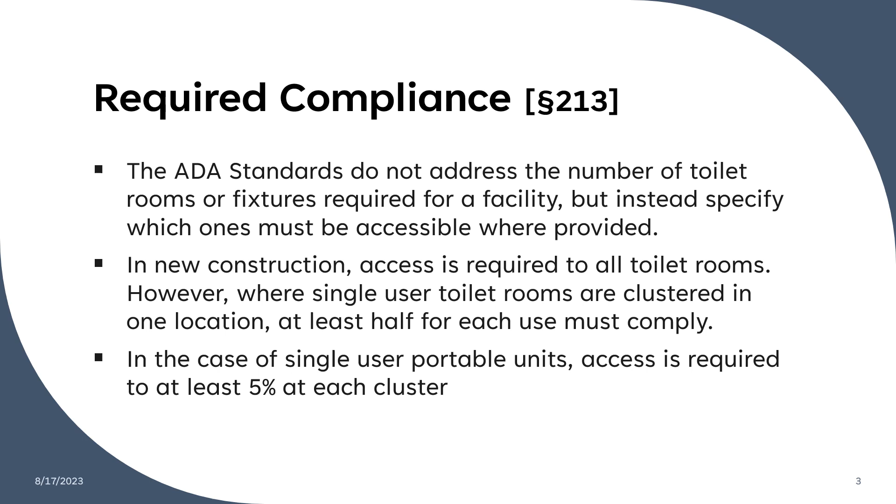In addition, compliant toilet rooms and portable units must be labeled by the International Symbol of Accessibility unless all are accessible.

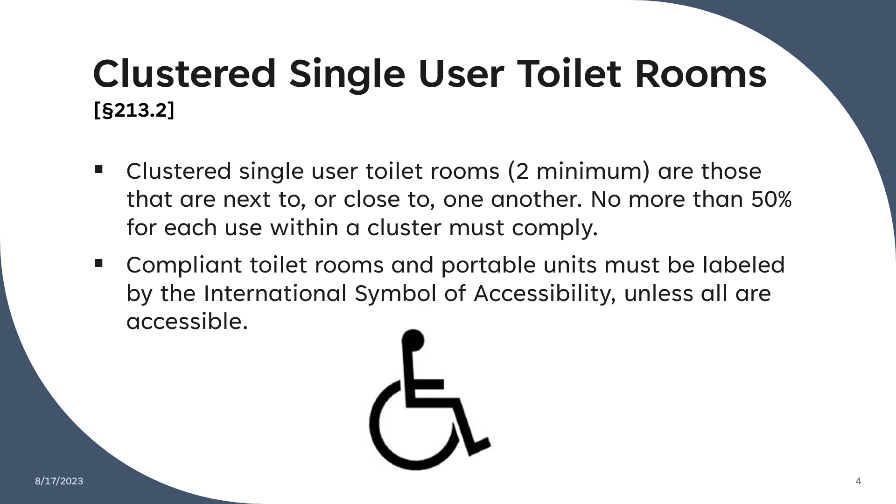Accessible unisex toilet rooms cannot serve as a substitute for access to multi-user rooms, except where alterations to do so would not be technically feasible. Where both types of restrooms are provided, they both must comply.

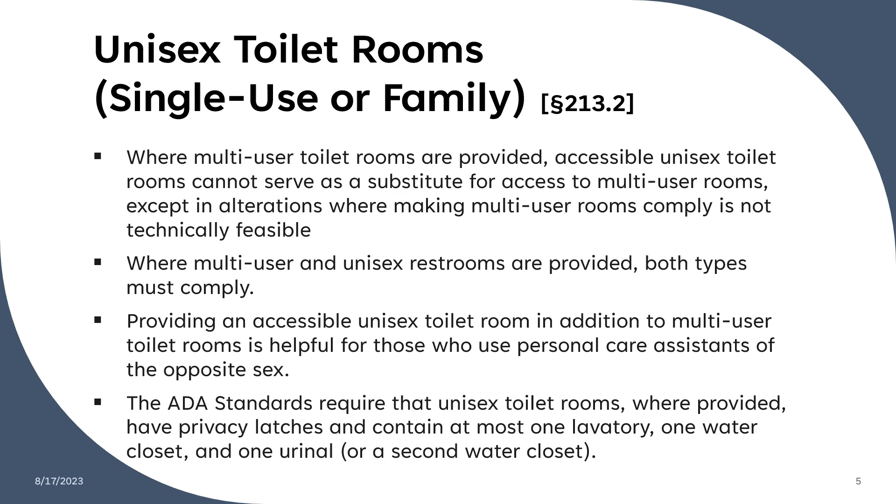ADA standards require that unisex toilet rooms, where provided, have privacy latches and contain at most one lavatory, one water closet, and one urinal.

Compliance in an alteration is not required where it is technically infeasible, which is defined as something that has little likelihood of being accomplished because existing structural conditions would require removing or altering a load-bearing member that is an essential part of the structural frame, or because other existing physical or site constraints prohibit modification or addition of those elements.

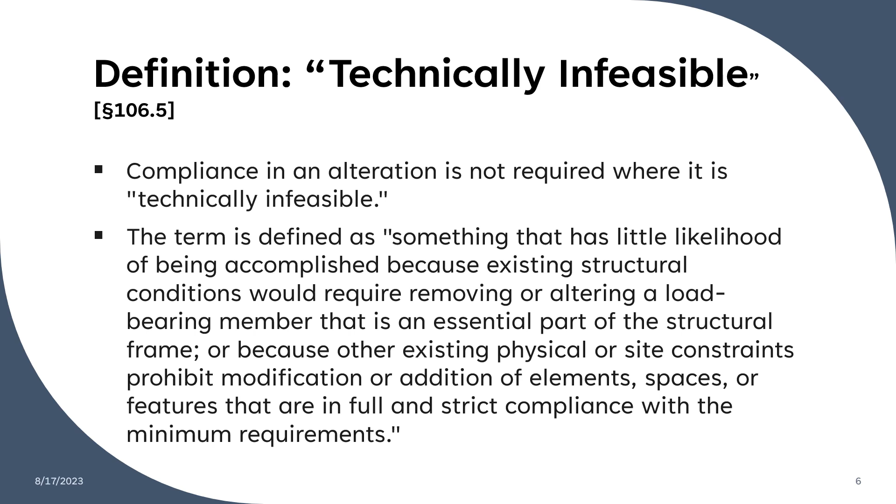When existing toilet rooms are altered, the standards apply according to the planned scope of work. If one toilet room on a floor is altered, the standards apply to that room only. Similarly, if all the toilet rooms on the floor are altered, the standards apply to each toilet room that would be required to comply in the new construction.

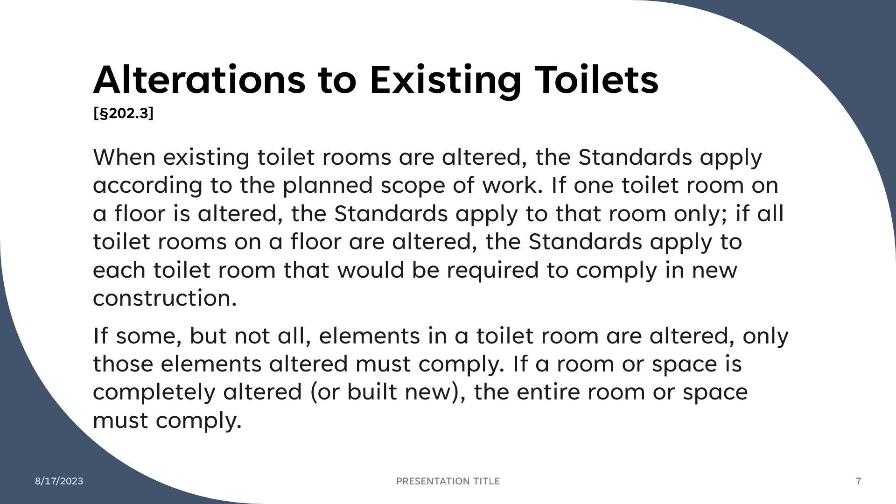For the elements, if some but not all are altered, only those altered elements must comply, unless the entire room or space has been redone.

There are exceptions for qualified historic facilities, such as those determined by the appropriate state historic preservation official or advisory council on historic preservation.

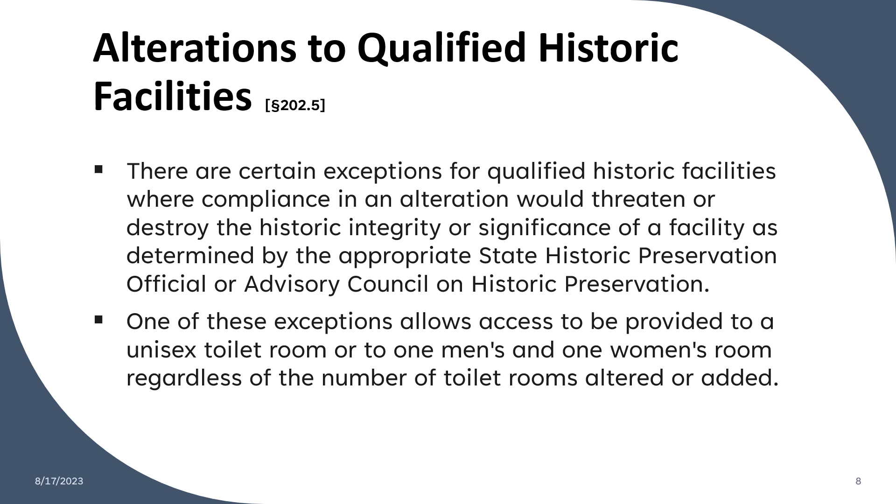Next, we move on to the general components common among single and multi-user bathrooms. Criteria for water closets address location, clearance, seats, grab bars, flush controls, and dispensers.

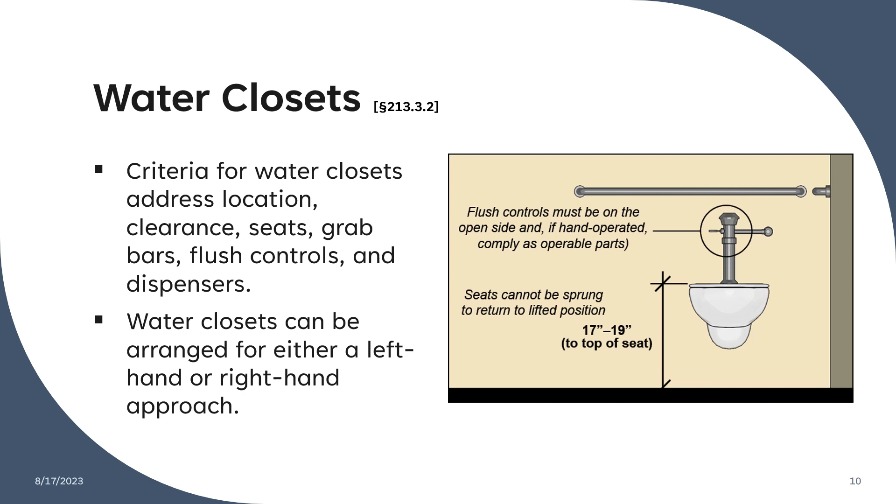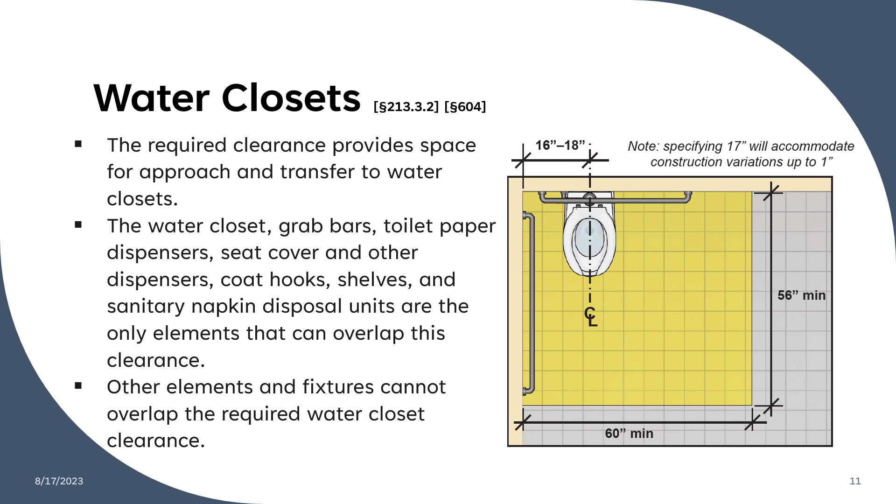Water closets can be arranged for either a left-hand or right-hand approach. The required clearance provides space for approach and transfer to water closets. Elements and fixtures cannot overlap the required water closet clearance, with some exceptions such as grab bars, toilet paper dispensers, etc.

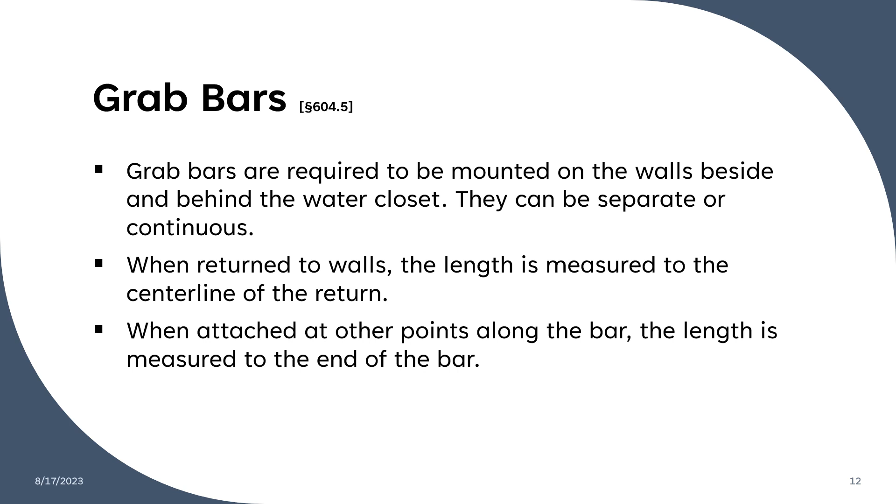Grab bars are required to be mounted on the walls beside and behind the water closet. They can be separate or continuous. The length of the grab bar is measured based on whether it returns to the wall or is attached to other points along the bar.

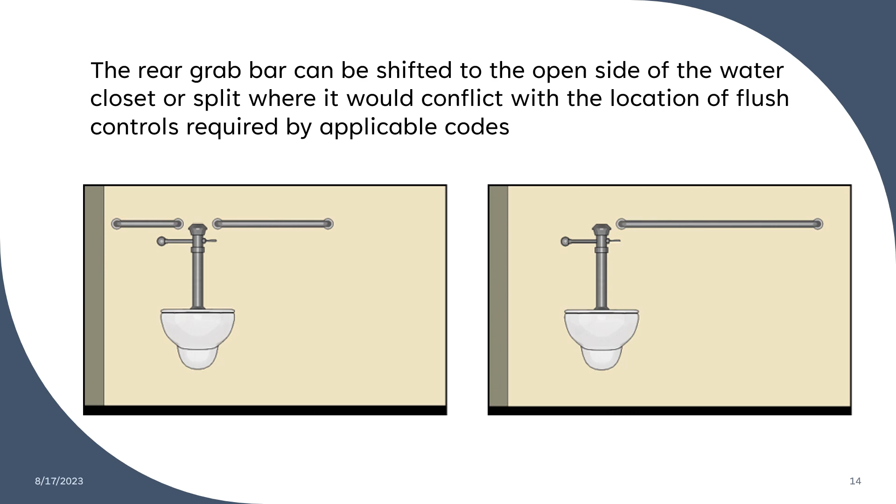Grab bars can have circular or non-circular cross sections but must have rounded edges. There's a requirement for clearance between the grab bar and the wall to prevent entrapment, and any projecting object must be located at least 12 inches above the grab bars and at least 1.5 inches from the bottom.

There's a structural strength requirement of at least 250 pounds at any point along the bar.

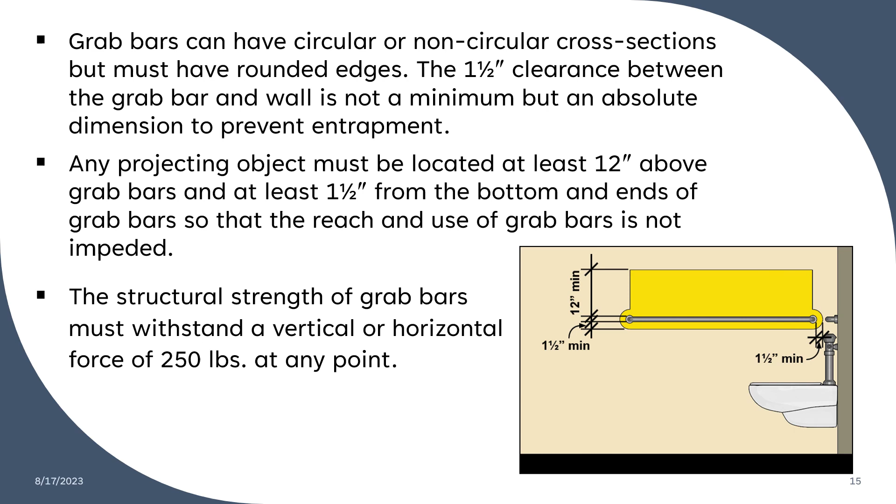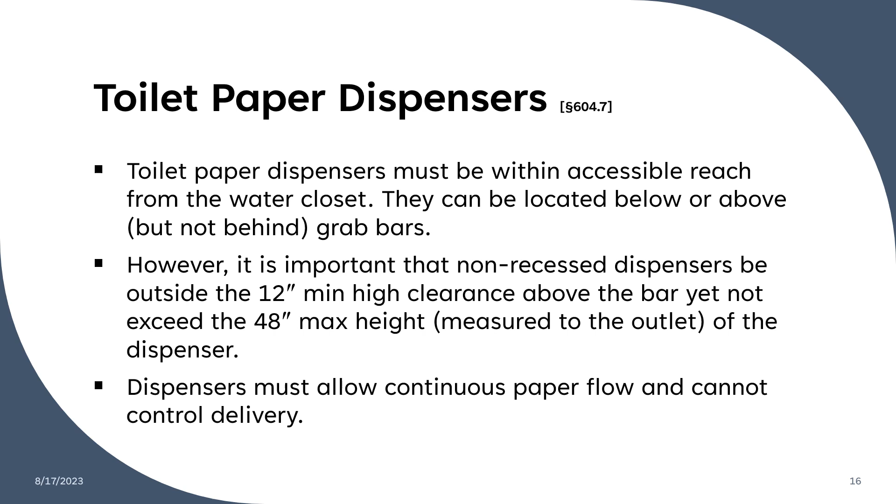Toilet paper dispensers must be within accessible reach from the water closet. It's also important that non-recessed dispensers be outside the 12-inch minimum clearance above the bar. Dispensers must allow continuous paper flow and cannot control delivery. Here are the specifications for recessed and non-recessed dispenser locations.

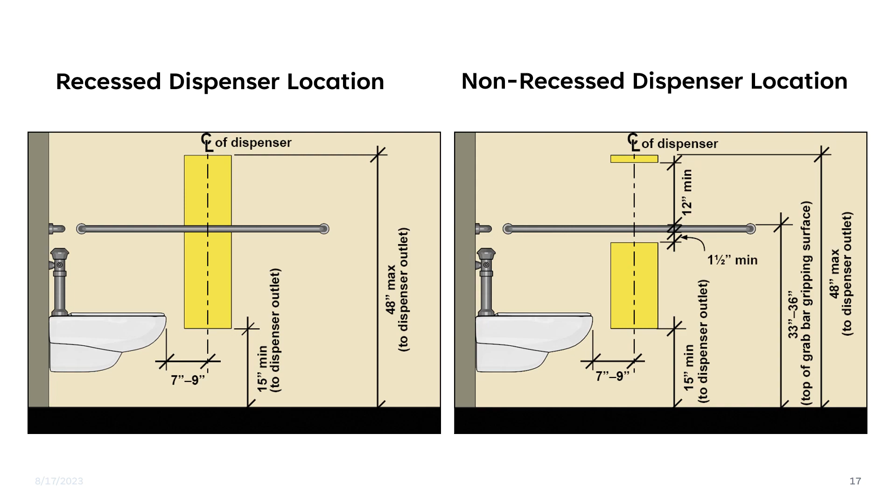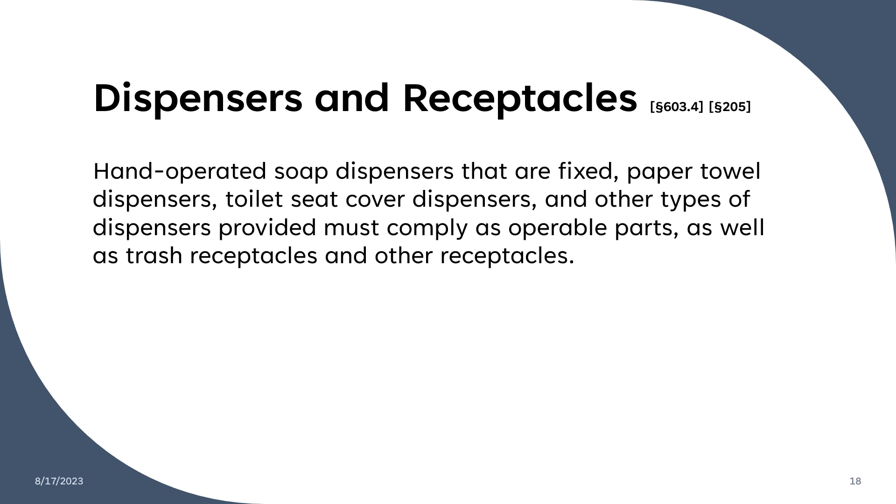Dispensers and receptacles such as hand-operated soap dispensers that are fixed, paper towel dispensers, toilet seat cover dispensers, and other types must comply as operable parts.

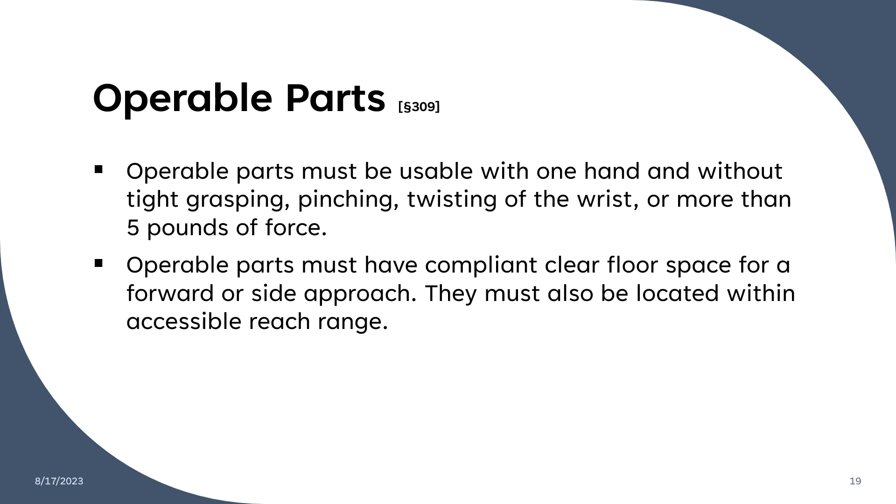Operable parts must be usable with one hand and without tight grasping, pinching, or twisting of the wrist, or more than 5 pounds of force. Operable parts must have compliant clear floor space for forward or side approach, and they must also be located within accessible reach range.

Next, we're going to go into the reach ranges from a forward and side reach, as well as a quick look at children's reach ranges.

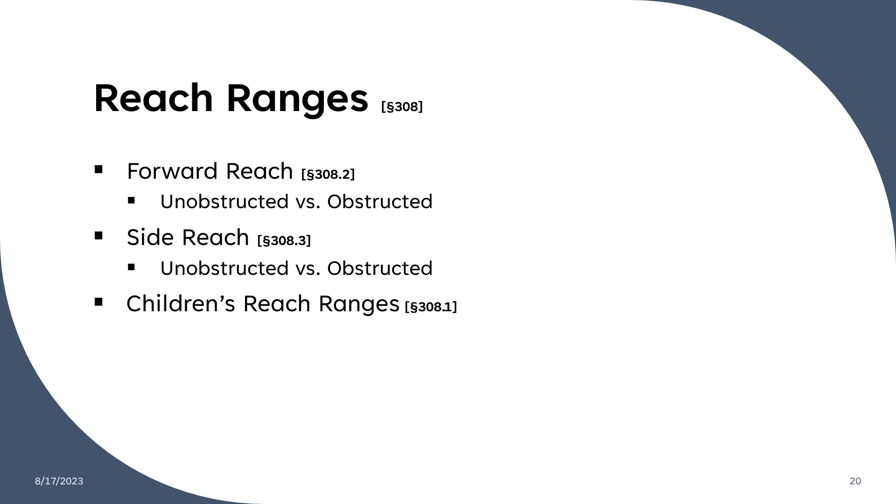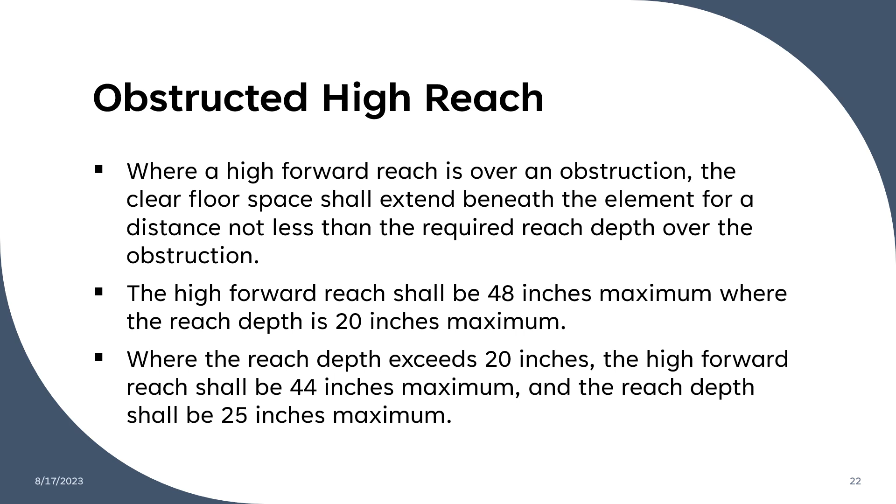An unobstructed forward reach shall be from 15 inches to 48 inches above the ground. Where a high forward reach is over an obstruction, the clear floor space shall extend beneath the element for a distance not less than the required reach depth over the obstruction. The high forward reach shall range depending on the reach depth below it. Here we have the diagram showing that the maximum height is dependent on the depth of the obstruction.

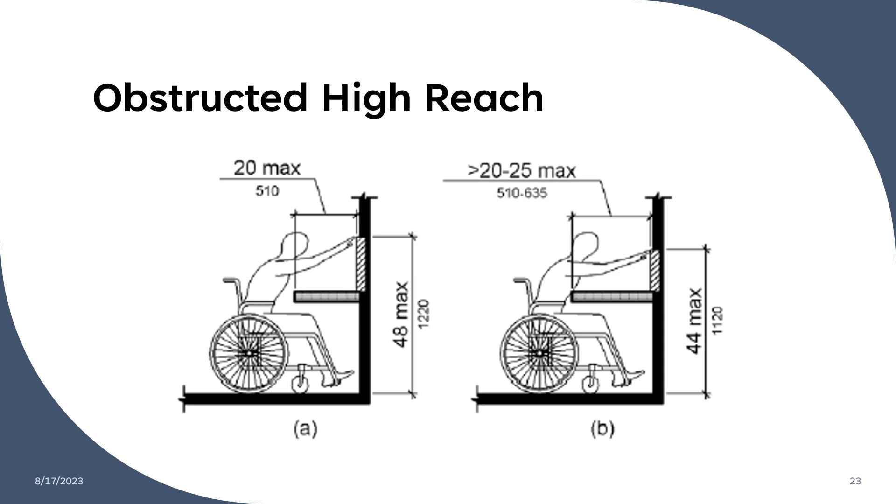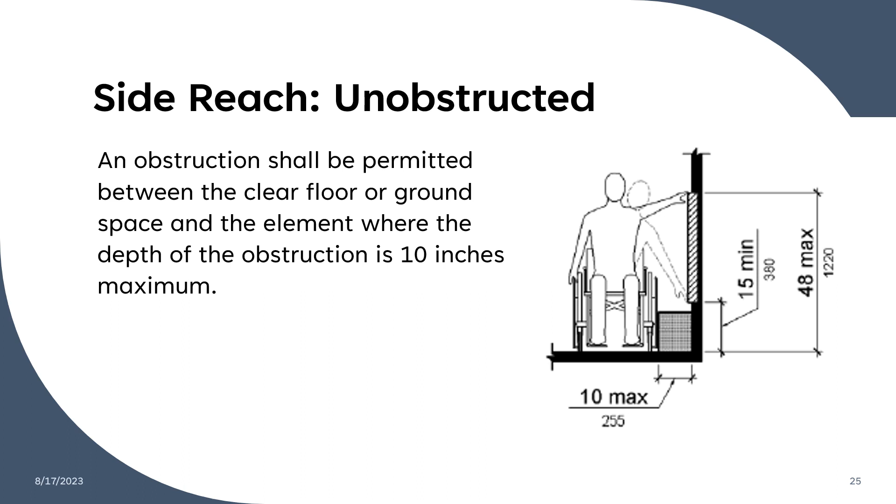For an unobstructed side reach, the range shall be from 15 to 48 inches. An obstruction shall be permitted between the clear floor or ground space and the element where the depth of the obstruction is 10 inches maximum. For an obstructed high reach, the range is between 24 to 34 inches. In similar fashion, the depth of the obstruction changes the maximum height of the reach.

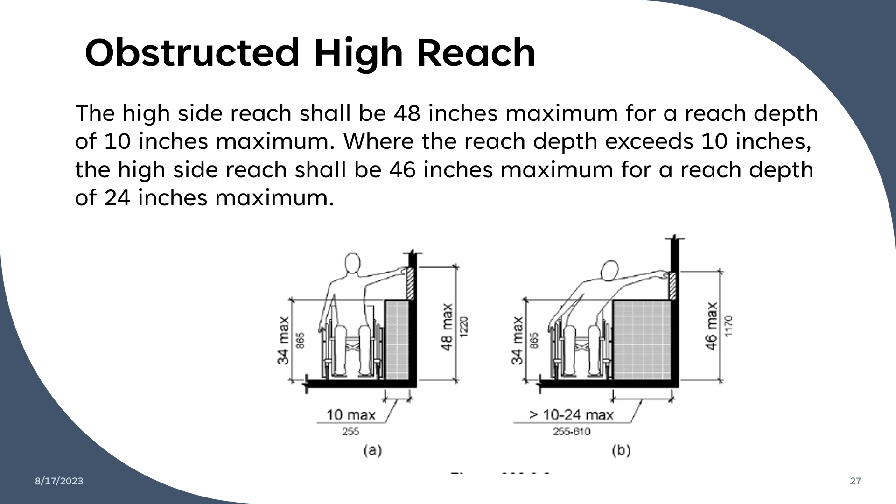While this presentation is looking at the ADA guidelines for adults, I did want to point out that there are guidelines for the various age ranges for children.

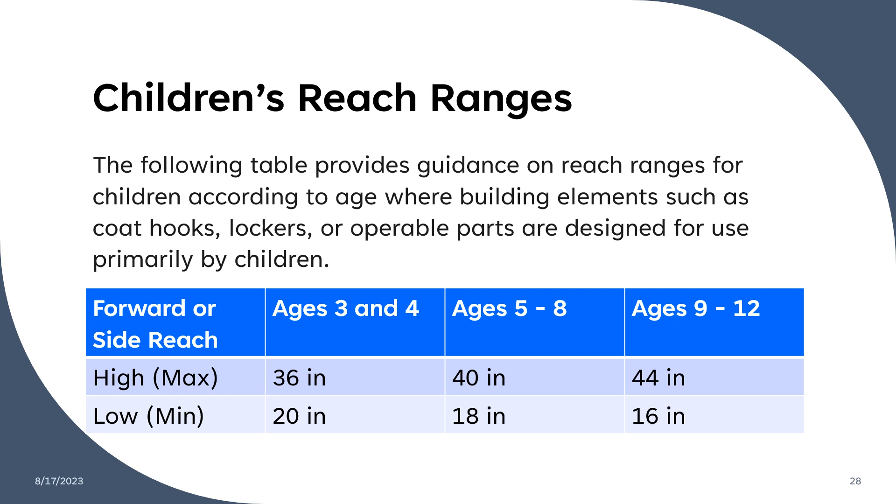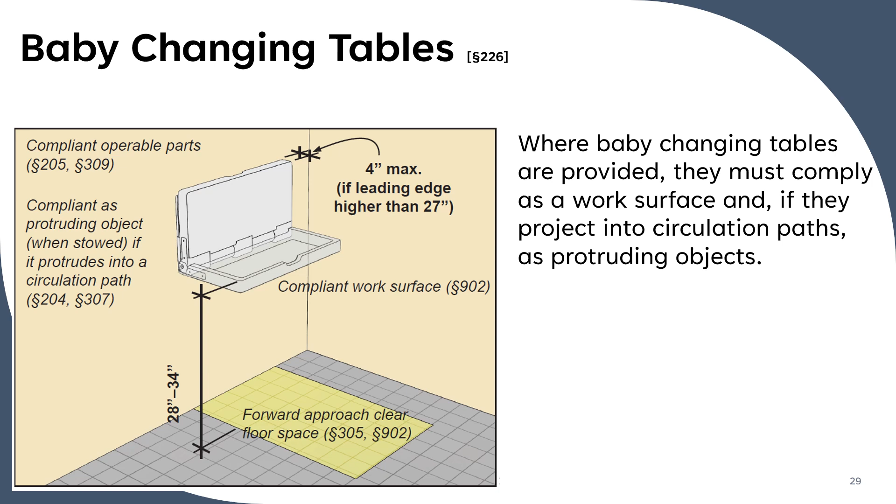Where baby changing tables are provided, they must comply as a work surface and a protruding object. It requires a clear forward approach and be compliant as an operable part. Baby changing tables cannot overlap fixture clearances or door maneuvering clearances when stowed. However, the clear space for a forward approach can overlap those clearances.

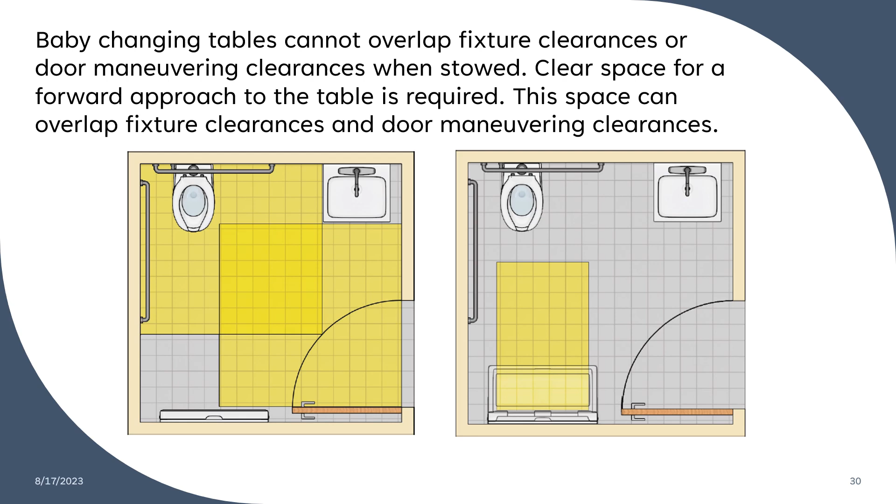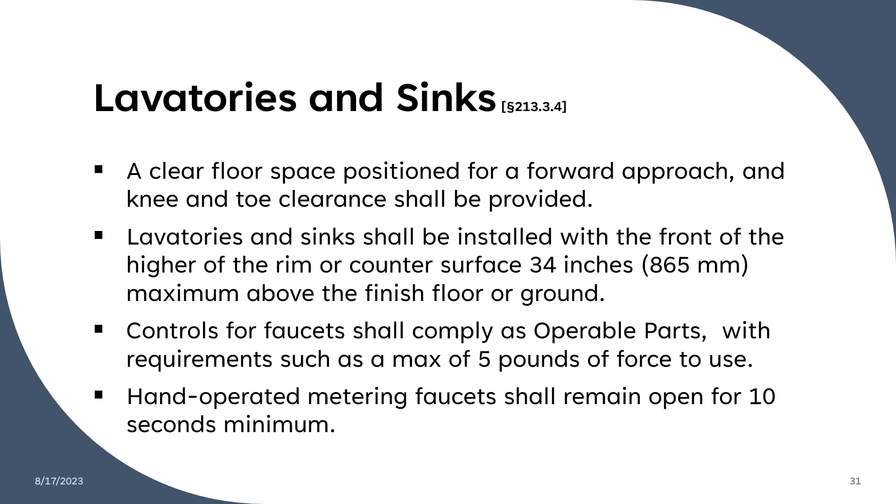Lavatories and sinks require clear floor space positioned for a forward approach, and knee and toe clearances shall be provided at a maximum of 34 inches from the ground. Controls for faucets shall comply as operable parts and only require a maximum of 5 pounds of force to use. And finally, hand-operated metering faucets need to remain open for 10 seconds at least.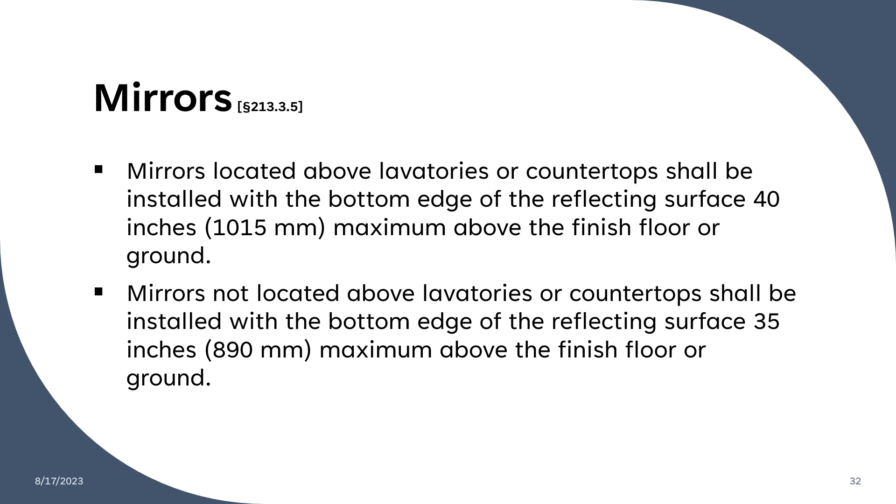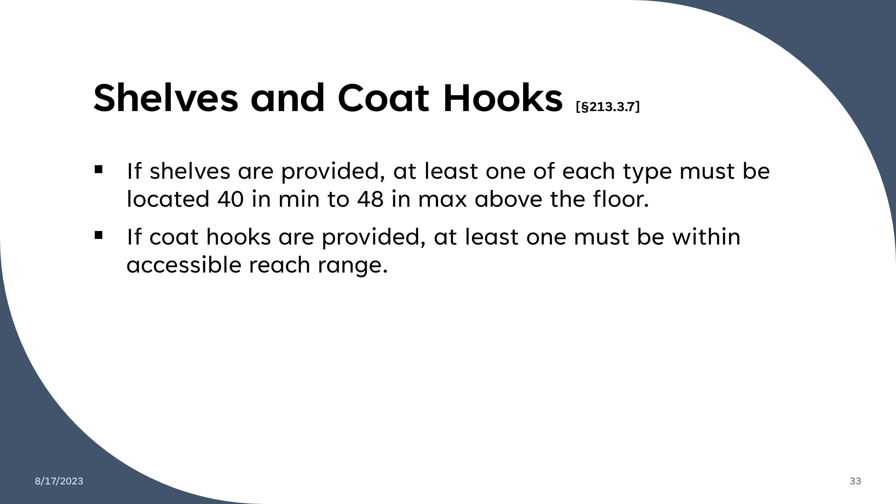Mirrors shall be installed with the bottom edge of the reflecting surface 40 or 35 inches from the ground, depending on whether or not the mirror is located above a lavatory countertop or not. If shelves are provided, at least one of each type must be located 40 inches to 48 inches above the floor, and if coat hooks are provided, at least one must be within accessible reach range.

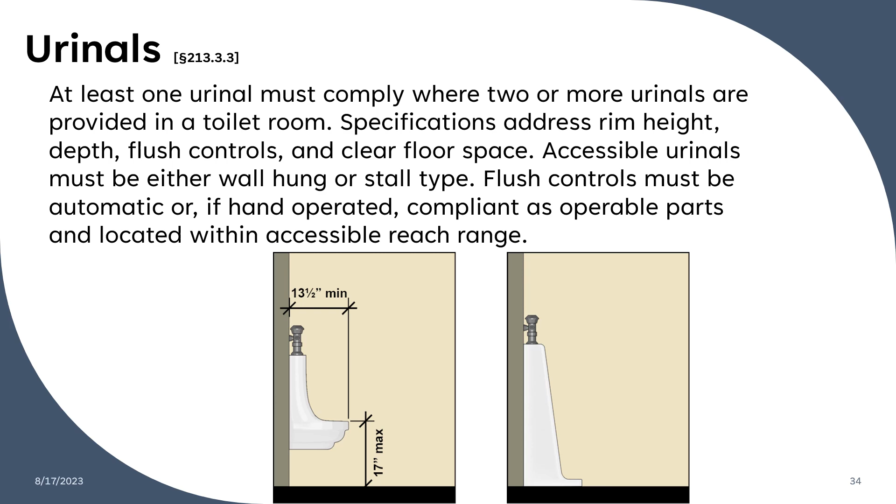At least one urinal must comply where 2 or more urinals are provided in a toilet room. Specifications address rim height, depth, flush controls, and a clear floor space. Accessible urinals must be either the wall-hung or stall type.

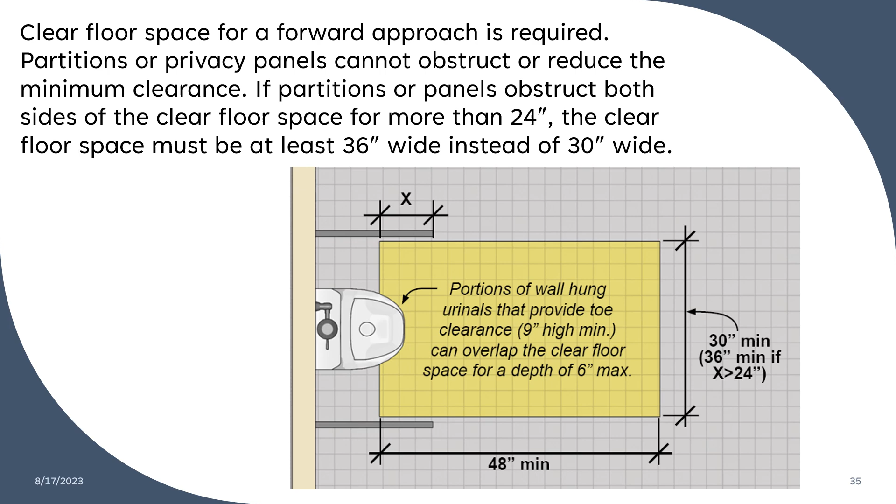Here are additional requirements for urinals, including a clear floor space for a forward approach, and that partitions or privacy panels cannot obstruct or reduce the minimum clearance.

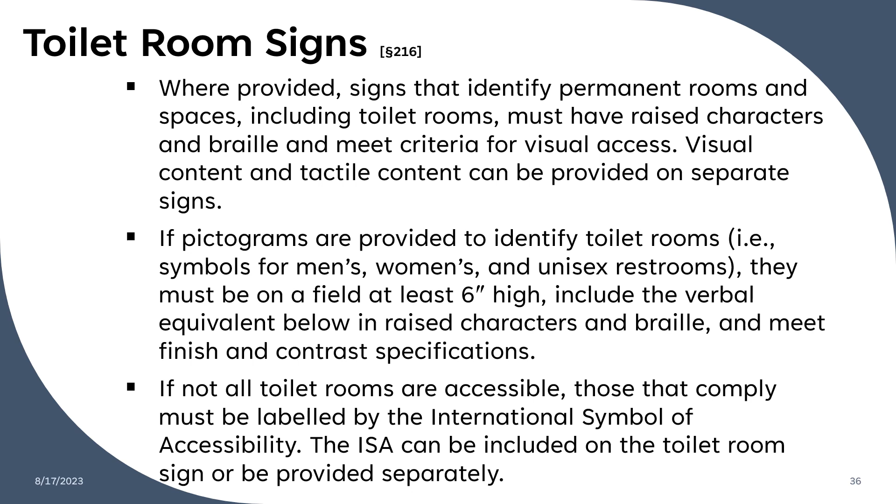Where provided, signs that identify permanent rooms and spaces, including toilet rooms, must have raised characters and Braille and meet criteria for visual access. The signs must be at least 6 inches high, and if not all the toilet rooms are accessible, those that comply must be labeled by the International Symbol of Accessibility.

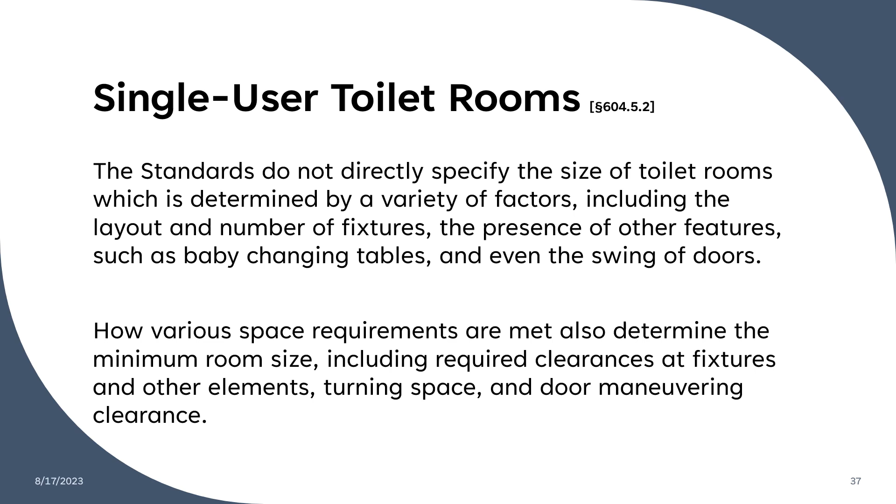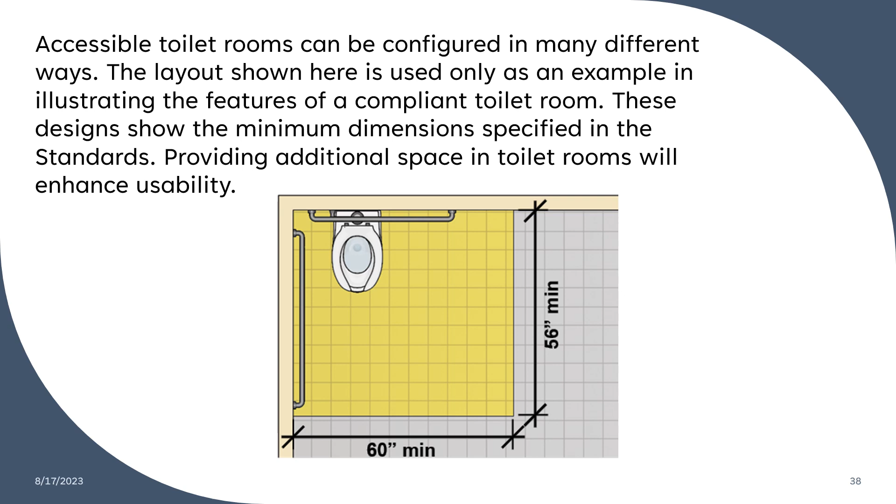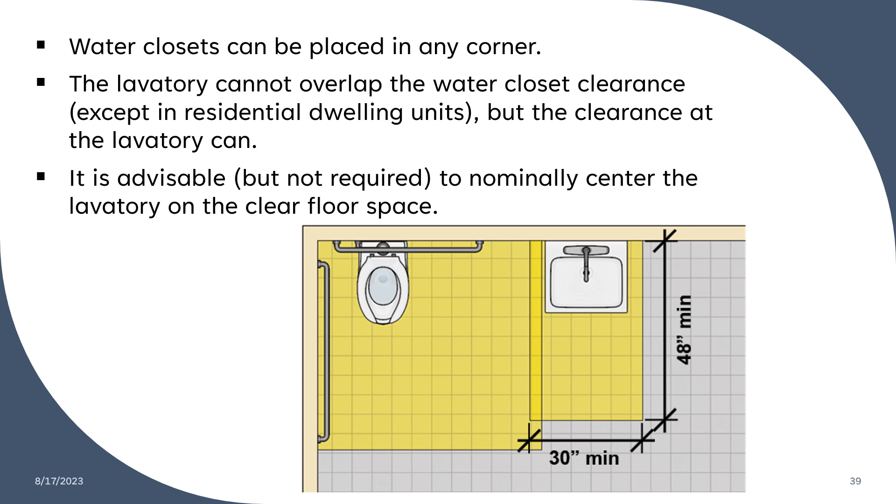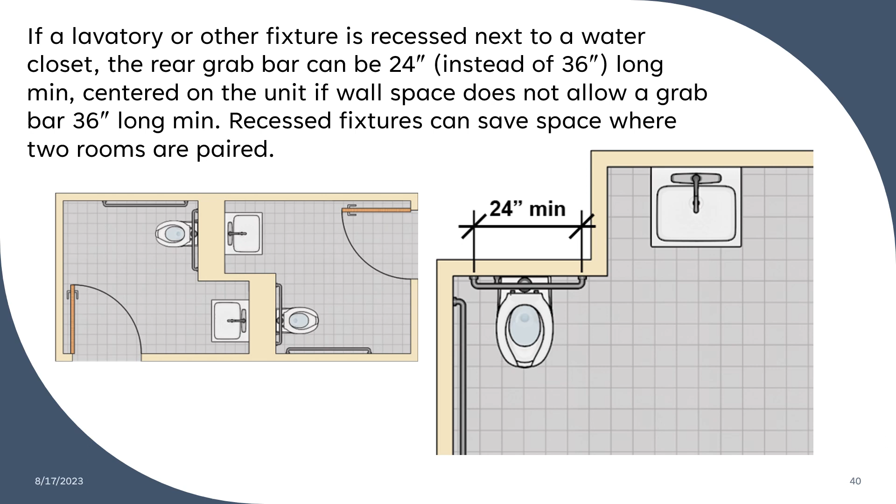If a lavatory or other fixture is recessed next to a water closet, the rear grab bar can be 24 inches if the wall space does not allow a grab bar of the full 36. Recessed fixtures can save space where 2 rooms are paired.

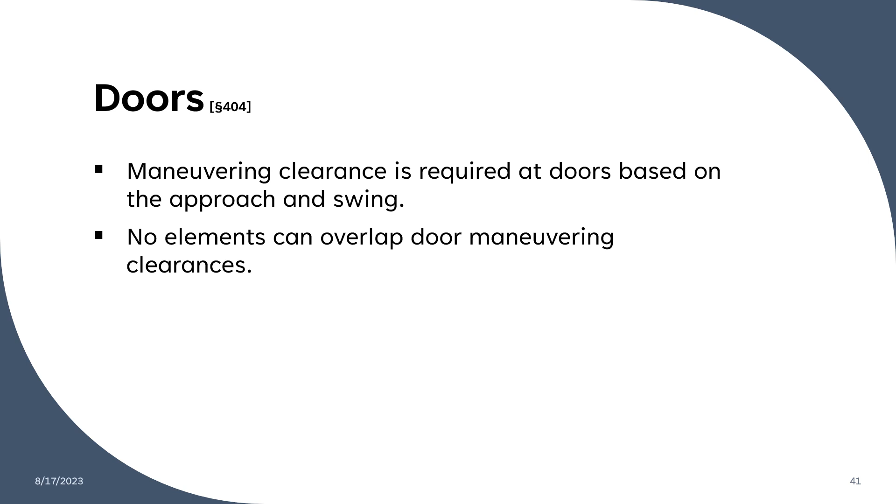Doors can swing into fixture clearances in single-user toilet rooms where unobstructed wheelchair space is available beyond the door swing. This provides space to enter the room and clear the door using wheeled mobility aids.

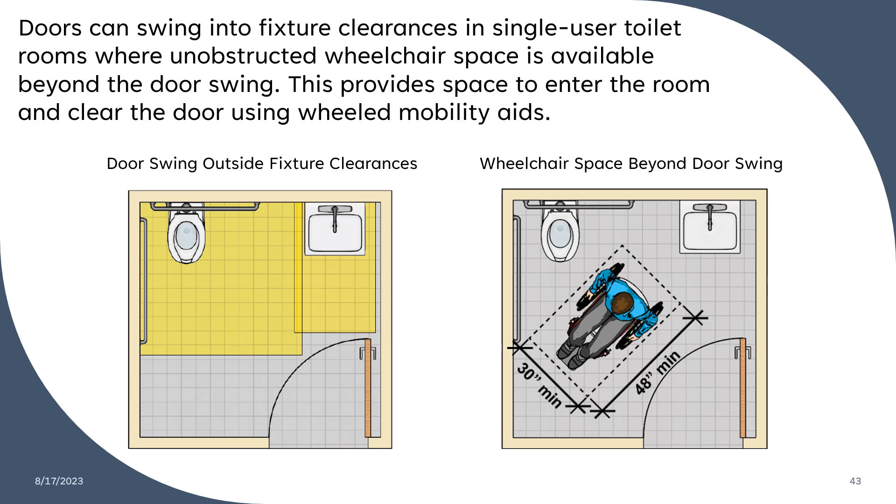Turning space is required in the room and can be provided either as a 60-inch diameter circle or T-shaped space. Doors can swing into the turning space, and the orientation of that T-shaped space is not specified.

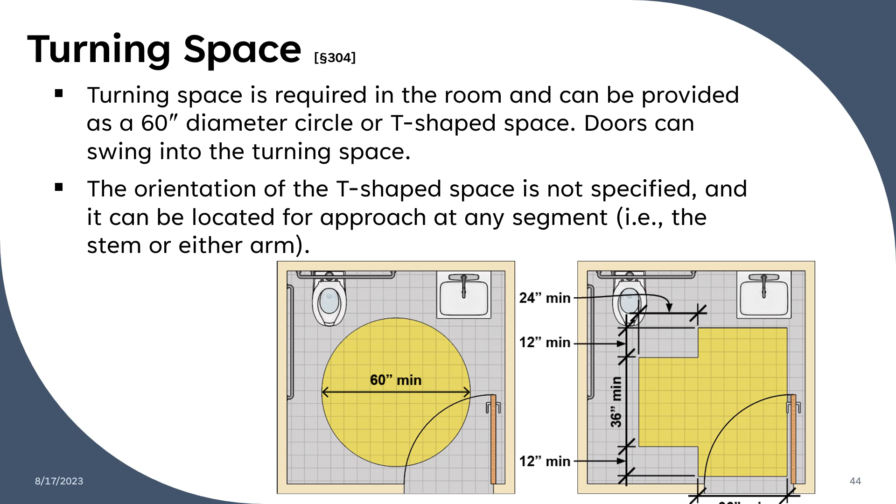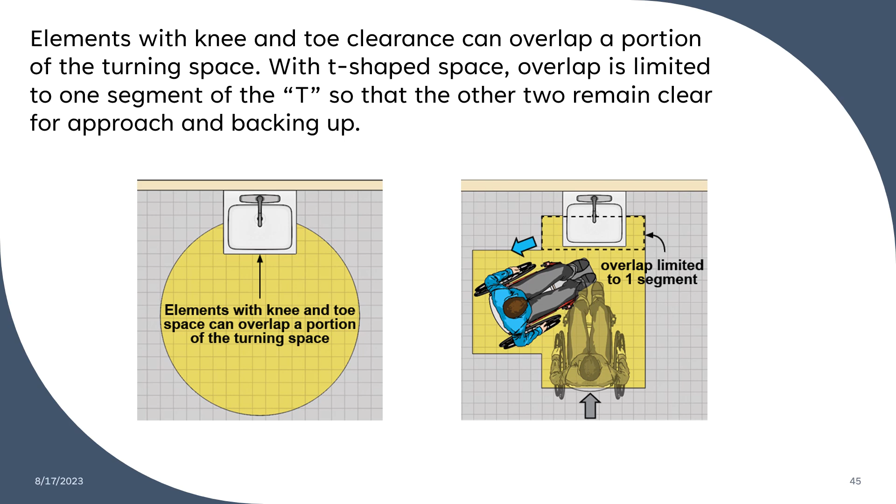Elements with knee and toe clearances can overlap a portion of the turning space, and with a T-shaped space, the overlap is limited to one segment of the T, such that the other two remain clear for approach and backing up.

With a water closet and lavatory side by side, the plumbing wall is typically determined by the width of the water closet clearance, the lavatory fixture width, plus any additional lavatory clearance beyond that fixture, unless the lavatory is recessed.

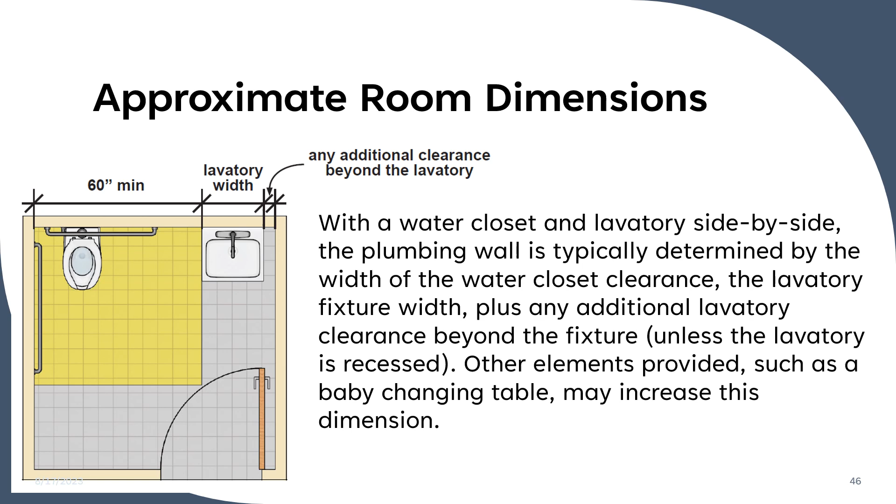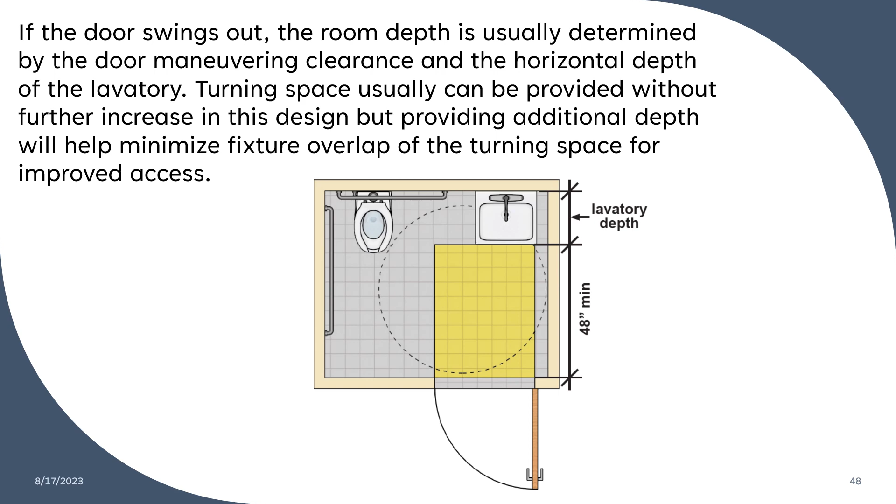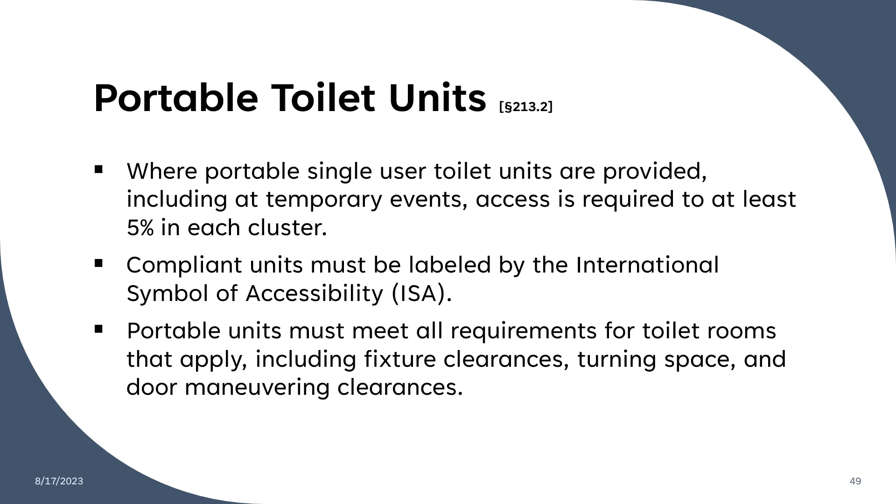For portable toilet units, access is required to at least 5% in each cluster. The compliant units must be labeled by the International Symbol of Accessibility, and those units must meet all requirements for toilet rooms. An accessible route and entrance are required to serve portable units.

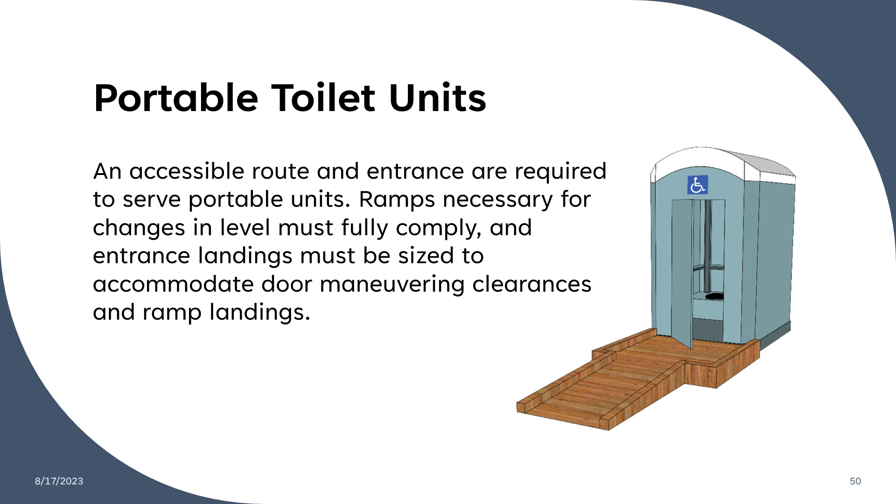Ramps necessary for changes in level must fully comply, and entrance landings must be sized to accommodate door maneuvering clearances and ramp landings. Compliance with all other applicable provisions for water closets, including those for grab bars and clearances, are required.

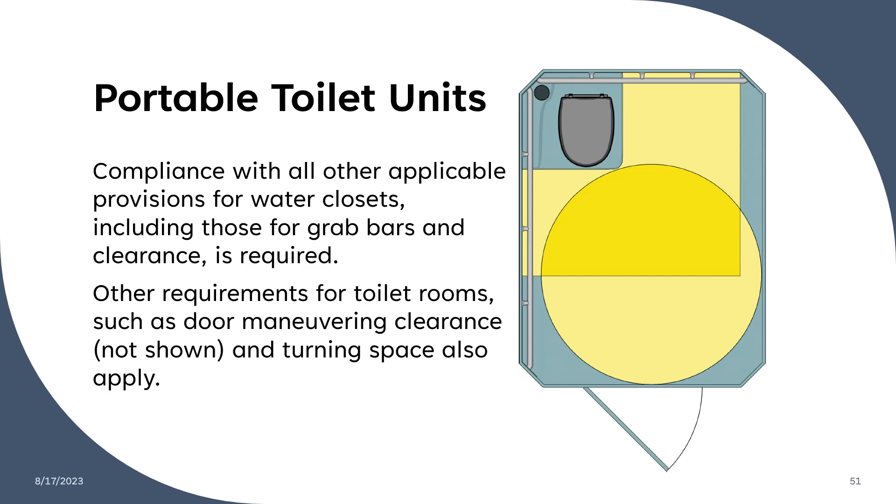Now we're moving on to multi-user toilet rooms. Here's a diagram showing all of the components of the room at large, requiring at least one wheelchair-accessible toilet compartment, at least one compliant urinal, at least one compliant lavatory, and so on.

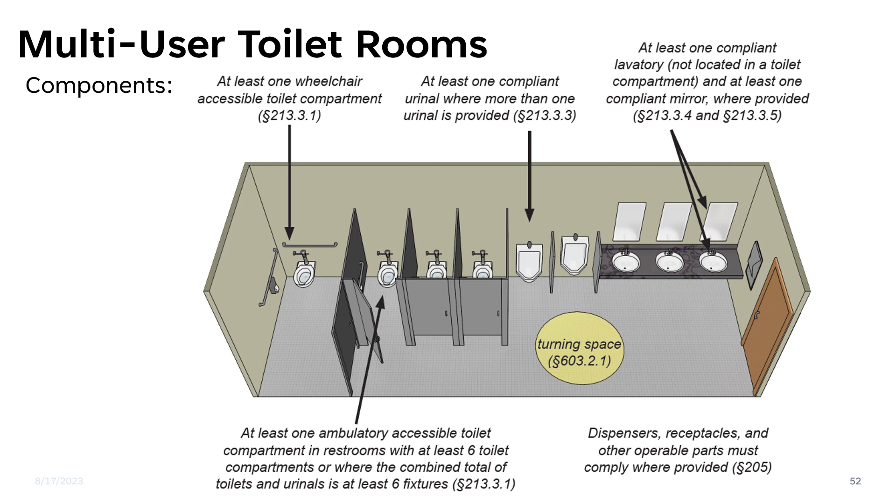Doors, including the toilet compartment doors, cannot swing into the clear floor space required at plumbing fixtures, but they can swing into the turning space.

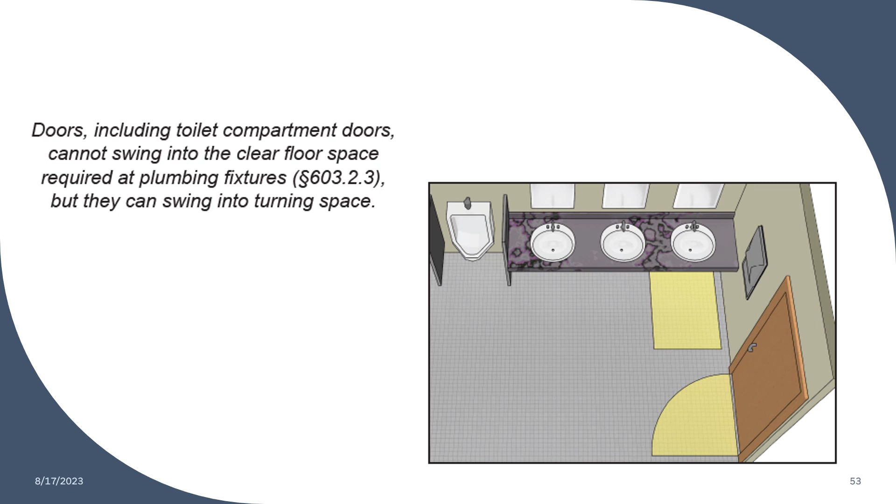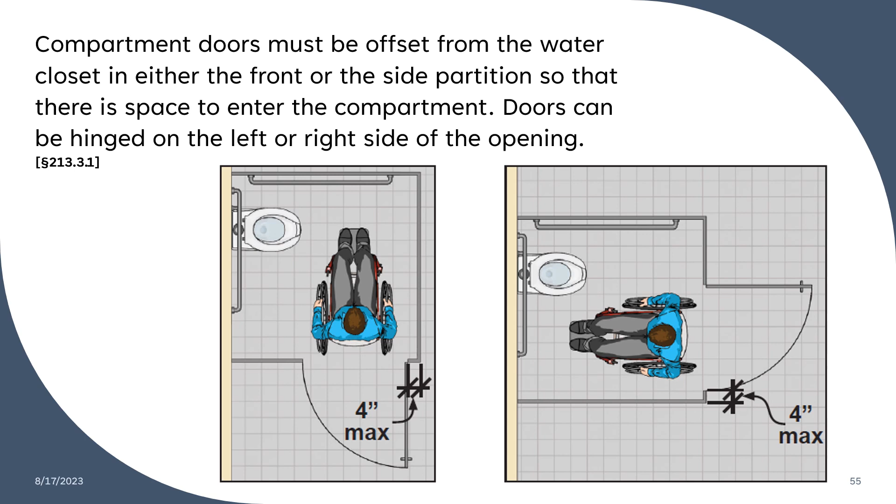At least one toilet compartment must be wheelchair accessible where toilet compartments are provided. Compartment doors must be offset from the water closet in either the front or the side partition so that there is space to enter the compartment. Doors can be hinged on the left or right side of the opening.

Compartment doors must meet applicable requirements for doors, including the clear width, 32 minimum, hardware, and opening force of 5 pounds maximum.

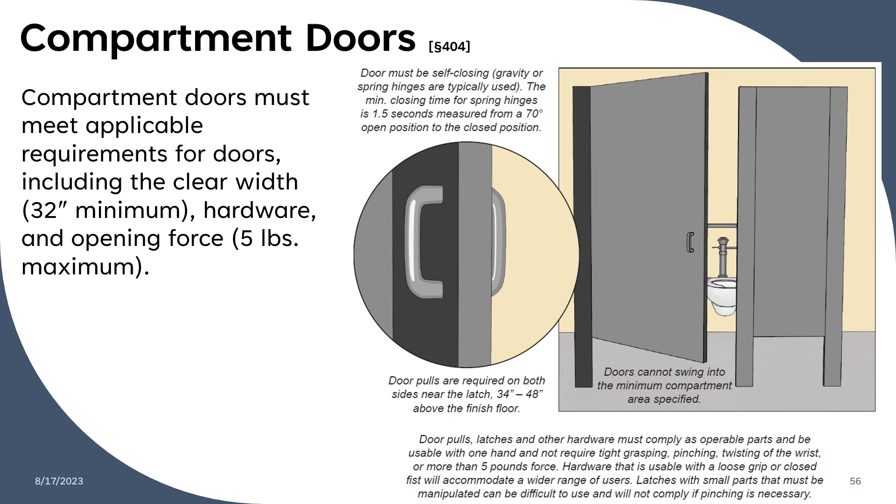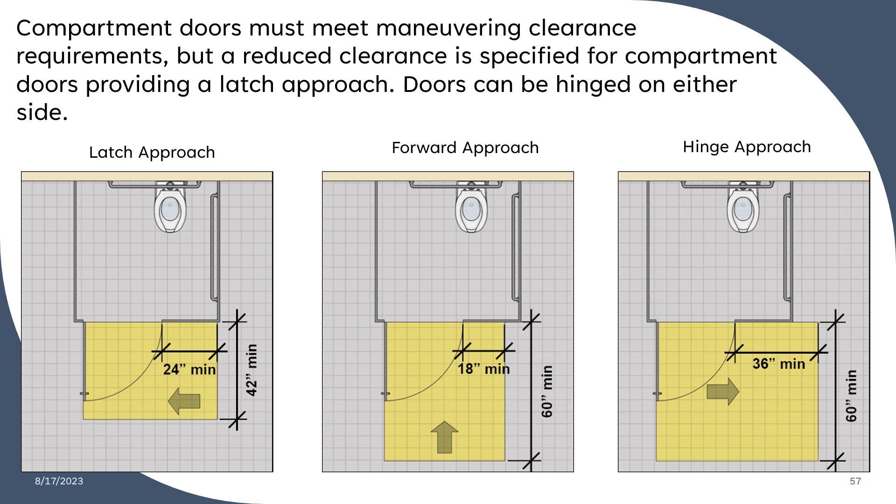Compartment doors must meet maneuvering clearance requirements. Doors can be hinged on either side. Here we have examples of a latch, forward, and hinge approach.

The required size of compartments provides the minimum space needed to enter, approach, and transfer to water closets, and then exit. As with water closets generally, the only elements that can overlap the minimum compartment water closet clearance area are the water closet, grab bars, dispensers, coat hooks, shelves, and sanitary napkin disposal units.

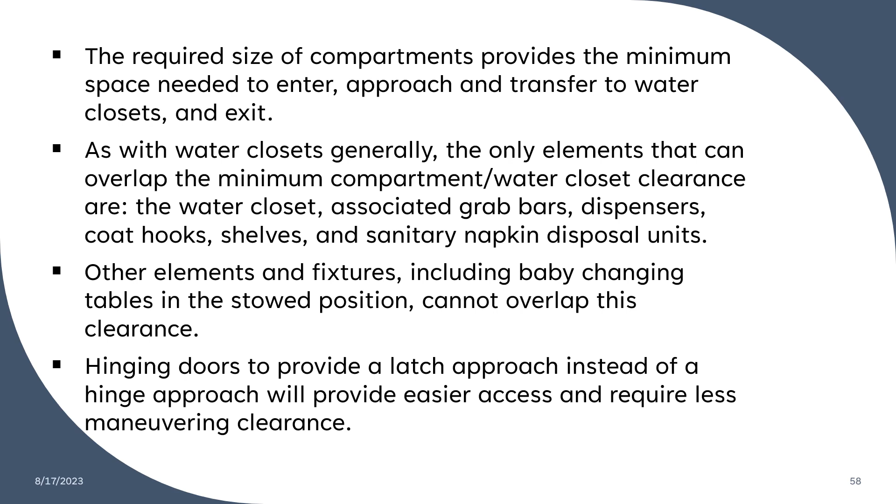Other elements and fixtures, such as baby changing tables in a stowed position, cannot overlap this clearance. If there is toe clearance below partitions, the compartment dimensions can be smaller.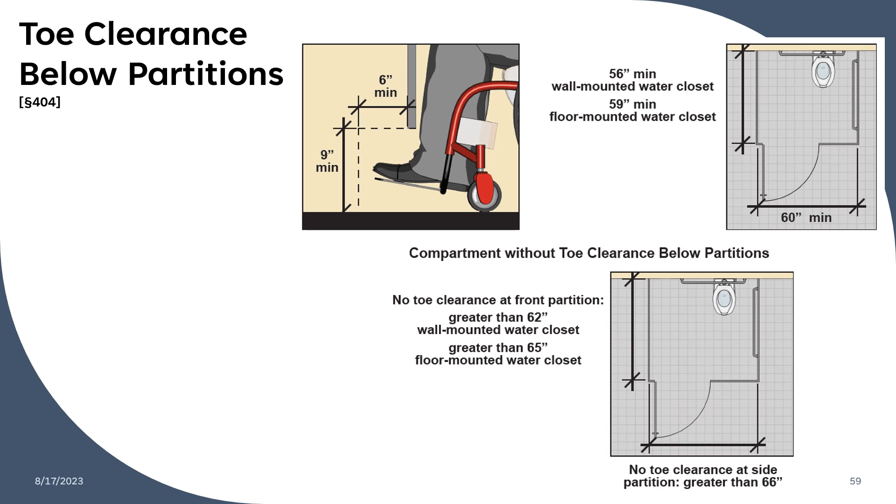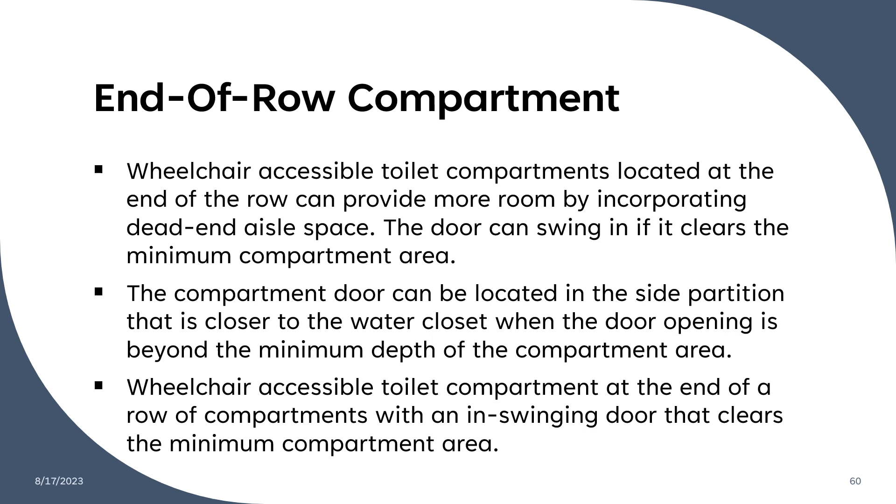Wheelchair-accessible toilet compartments located at the end of the row can provide more room by incorporating dead-end aisle space. The door can swing in if it clears the minimum compartment area.

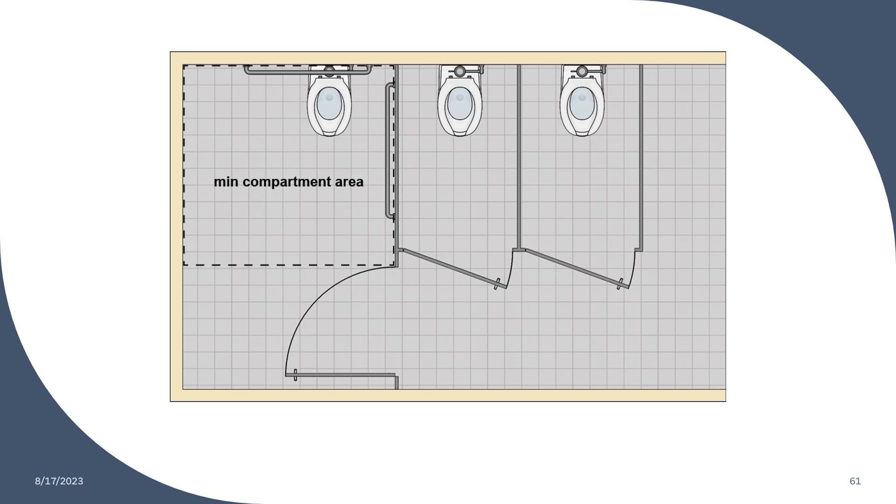The compartment door can be located in the side partition that is closer to the water closet when the door opening is beyond the minimum depth of the compartment area. No other fixture besides the toilet can be located in the minimum space required for the compartment.

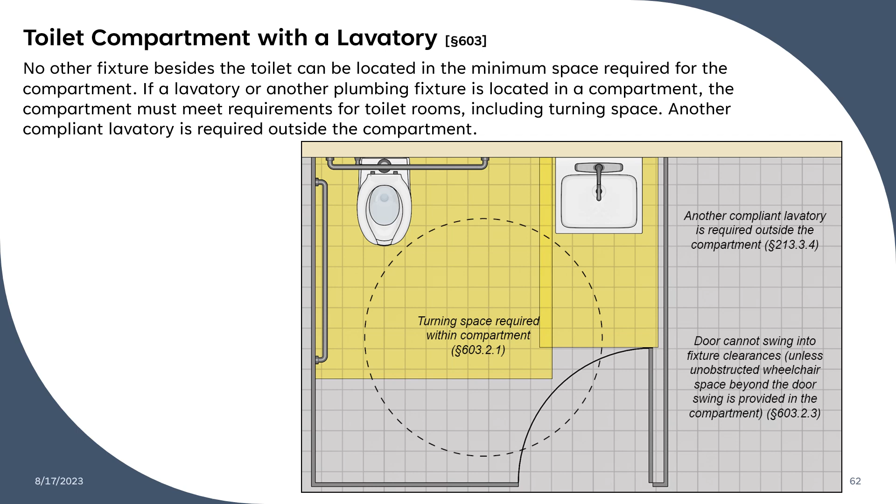If a lavatory or another plumbing fixture is located in a compartment, the compartment must meet requirements for toilet rooms, including turning space, and additionally, another compliant lavatory is required outside the compartment.

In closing, designing accessible bathrooms clearly requires a lot of care and forethought. An accessible design should focus on maneuverability and adjusting amenities for users from a seated position.